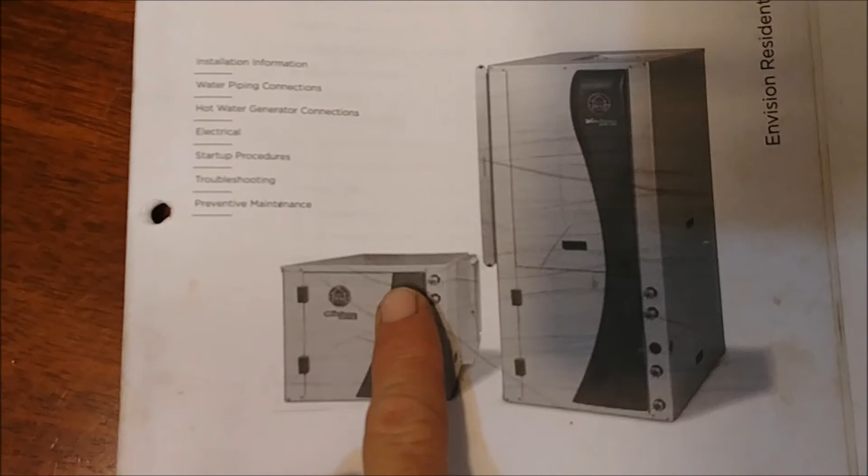So we've got your package units, the geothermal water furnace package units. The water goes into here, and if you have a desuperheater on it going to the water heater, they tie into here. This is a complete package unit. There's nothing else to it besides the loop, wherever it goes.

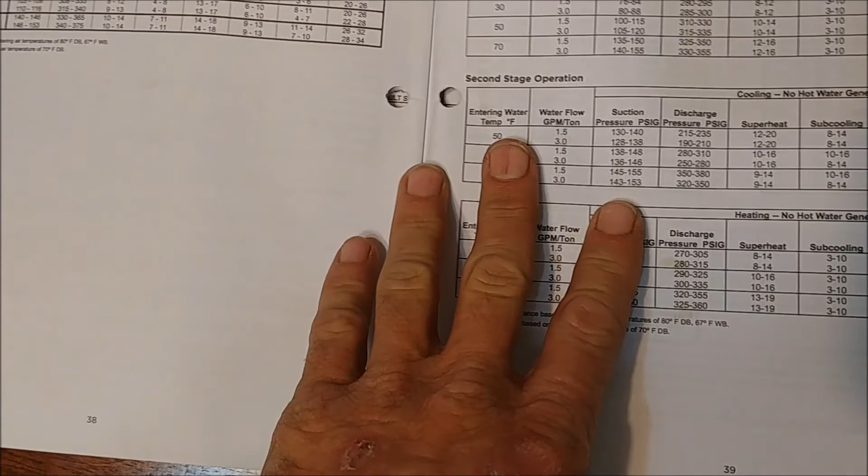But somebody asked me about ambient air temperature, superheat, and subcooling. So I wanted to make this quick video and show him. He was asking what the unit usually runs for head pressure on entering or outdoor ambient air temperature of say 70, 75 degrees, and what roundabouts would be the superheat and subcooling.

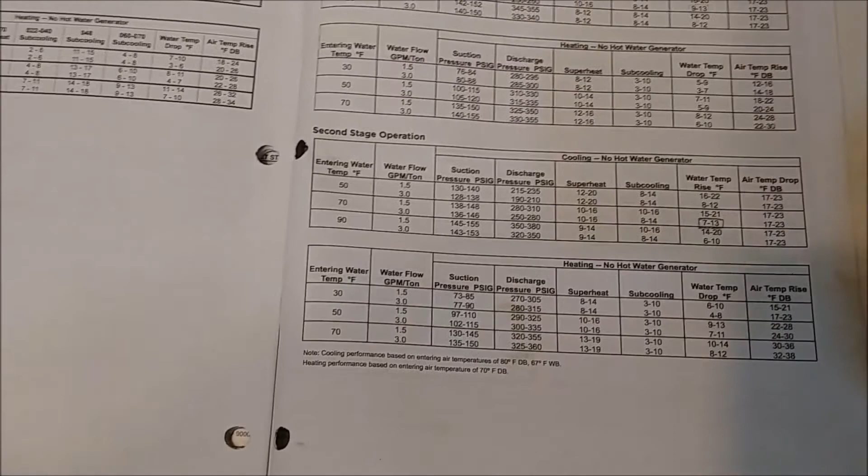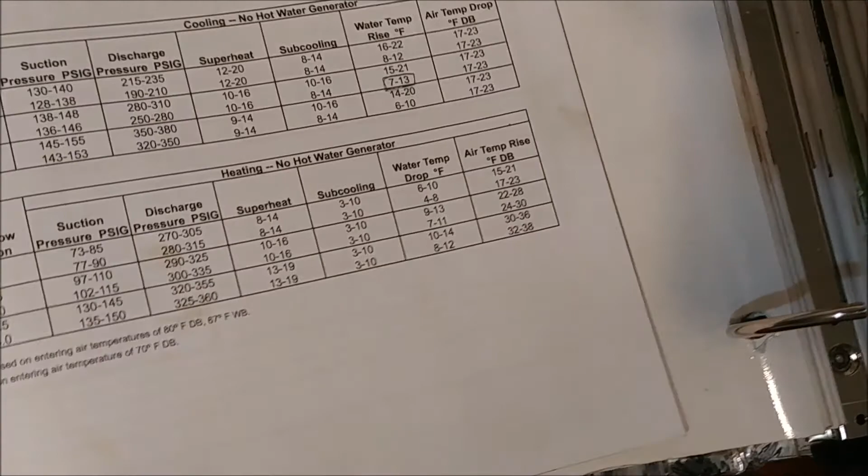So I found the parameters, which is in the installation manual. This is just for the Envision units. This isn't for the new Series 5 and Series 7, but I have that as well.

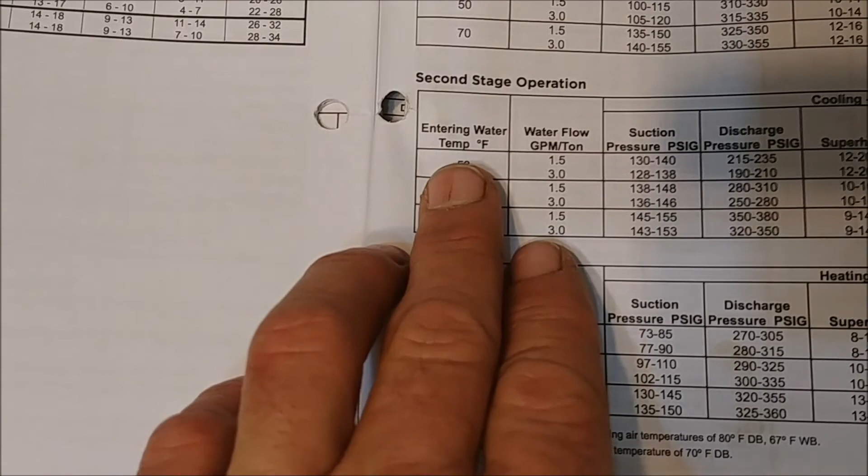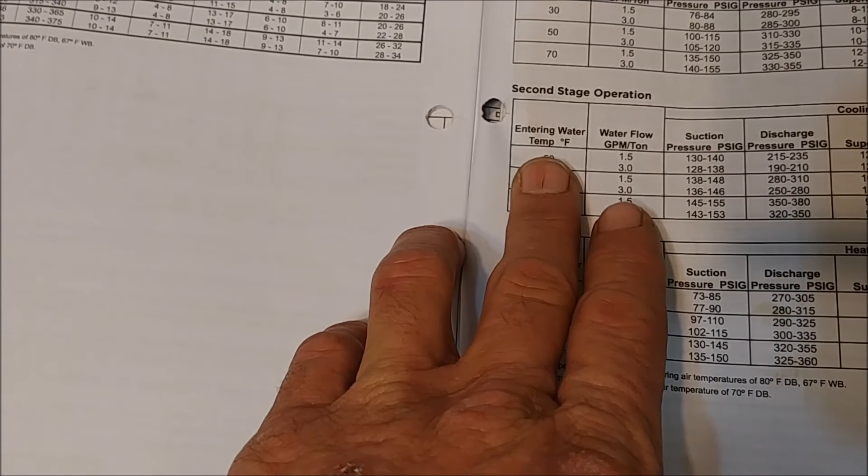But basically, your entering water temperature is the same thing as your entering air temperature, or your ambient air temperature to your condenser. Because if you're in cooling mode, your geothermal loop is basically your condenser. So you'd relate that in air-to-air terms as 70-degree entering water being the same as 70-degree outdoor ambient air temperature. So to answer that question, you can pause this to look at it.

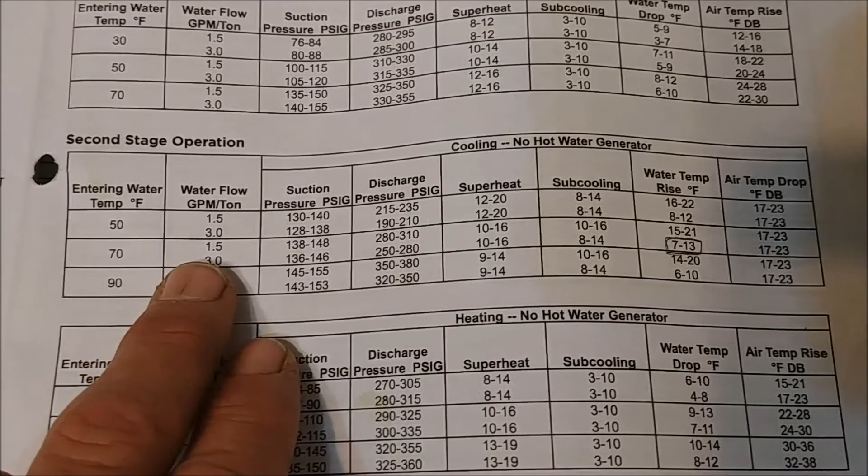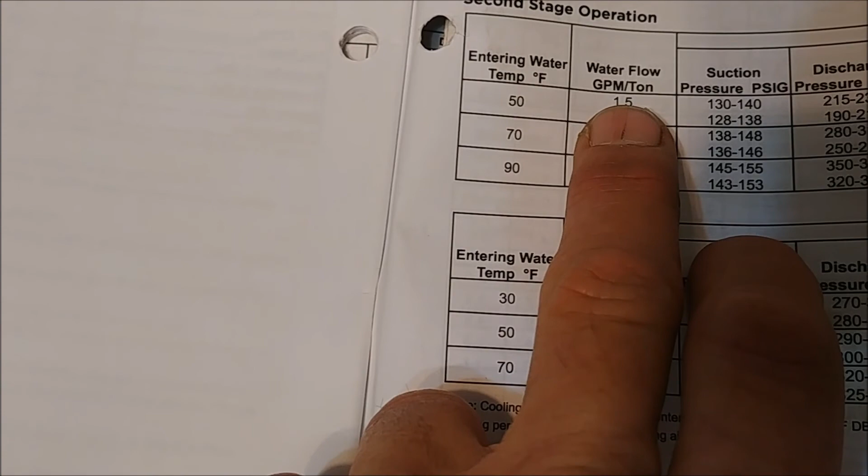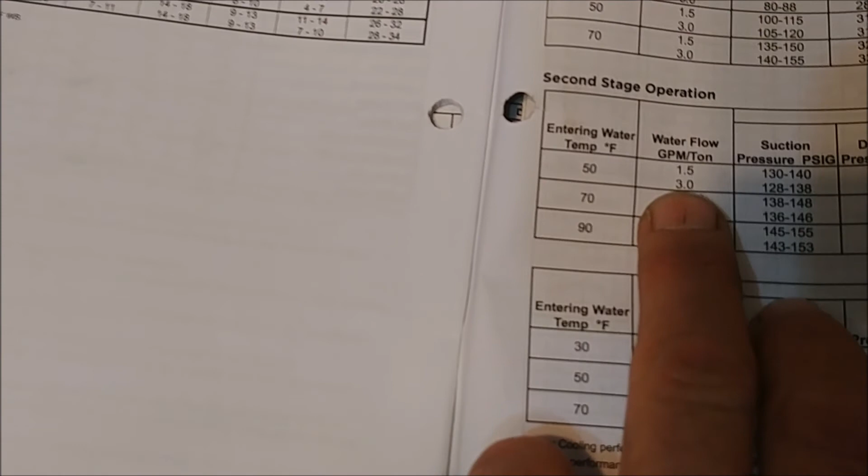You go across here, and the water flow rate is the speed, the gallons per minute, that goes through the unit. Typically you want 1.5 gallons a minute per ton going through the unit in an open loop system, and 3 gallons a minute per ton in a closed loop. So if you have a 3-ton unit, you want 9 gallons a minute.

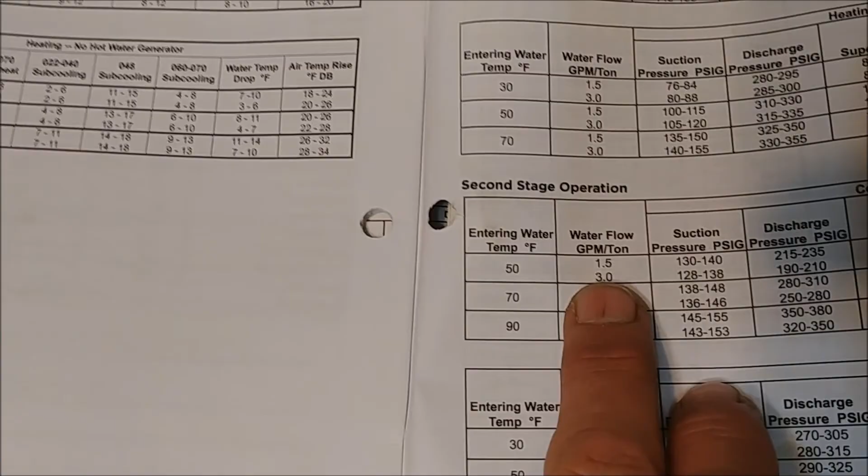And that would be the same thing in an air-to-air situation as having a variable speed fan on top of the condenser. Because I know some units out there, their condenser fan will speed up and slow down according to head pressure, especially for low ambient cooling.

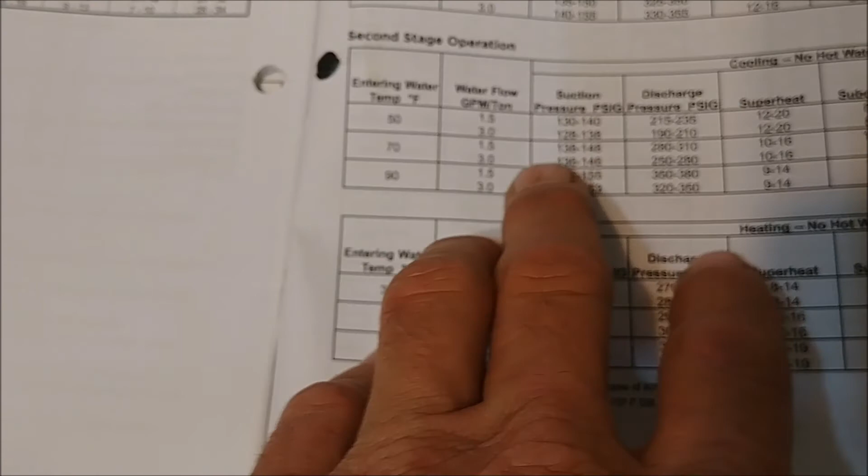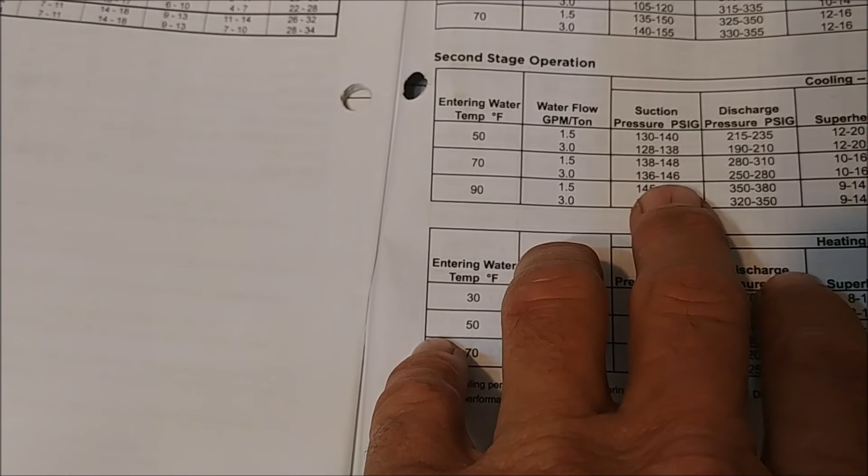Alright, but anyway, the discharge pressure, if you were on a closed loop system, this would be open loop, 1.5 gallons per ton, and closed loop, your suction pressure would be running right about there. Your head pressure - typically closed loop is what we work on, but if you ever get the open loop, these are the discharge pressures you'd probably be seeing.

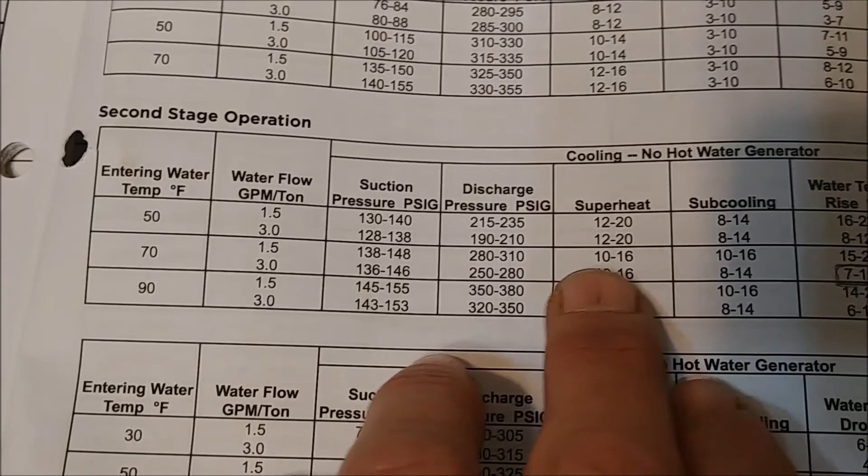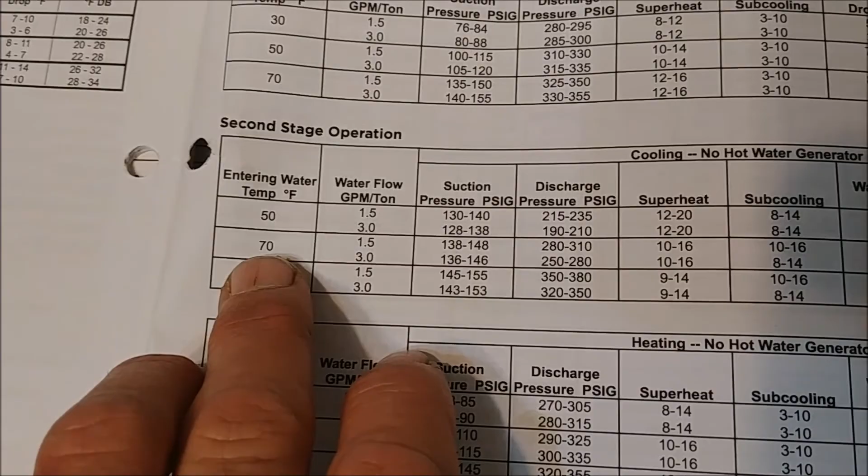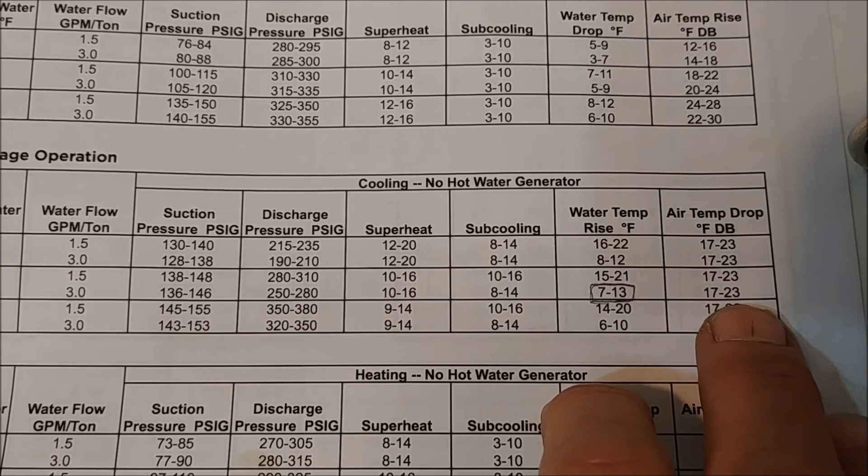Your superheat, no matter what, either way, 10 to 16, and that's at entering water temperature, which, like I said, is the same thing as ambient outdoor air temperature on an outdoor air-to-air condenser. This should be your air temperature drop, and in cooling mode these units do 17 to 23 degrees. So I hope that helps - that was a little bit on that.

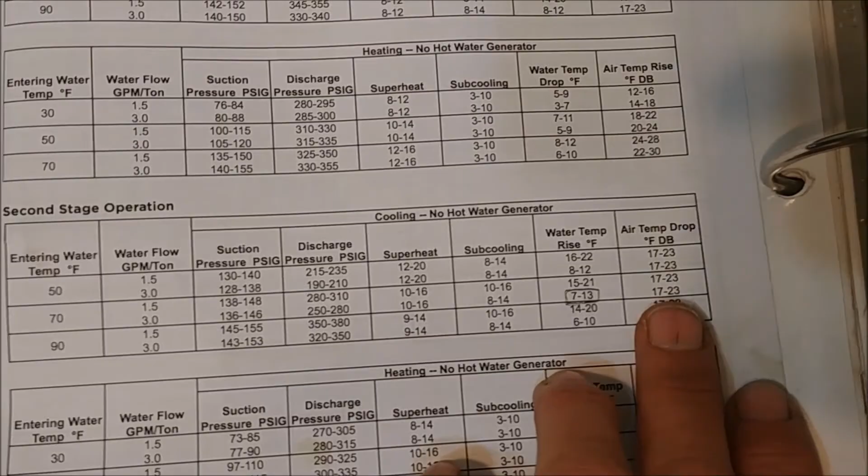This is the second stage operation. There's a bit of a difference in the first stage because these are dual capacity units in this chart. So I'll give you a second to look at them.

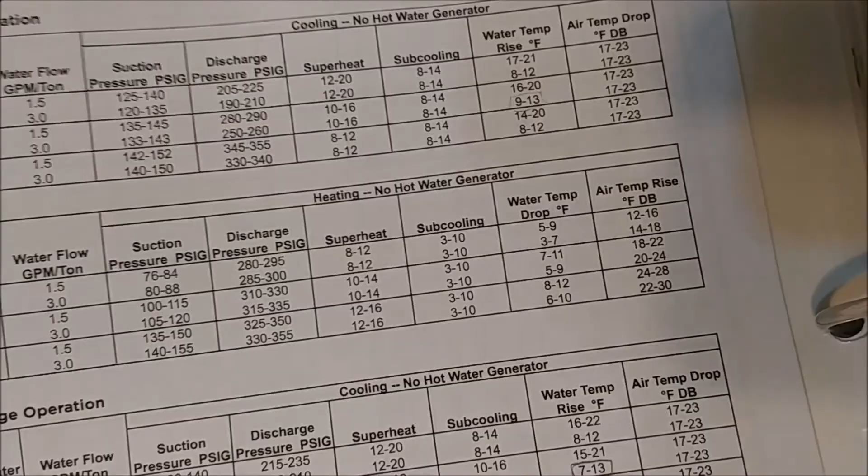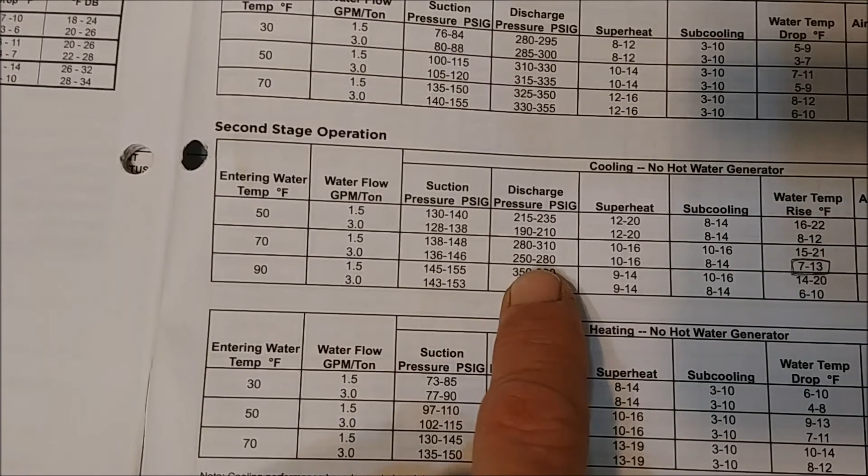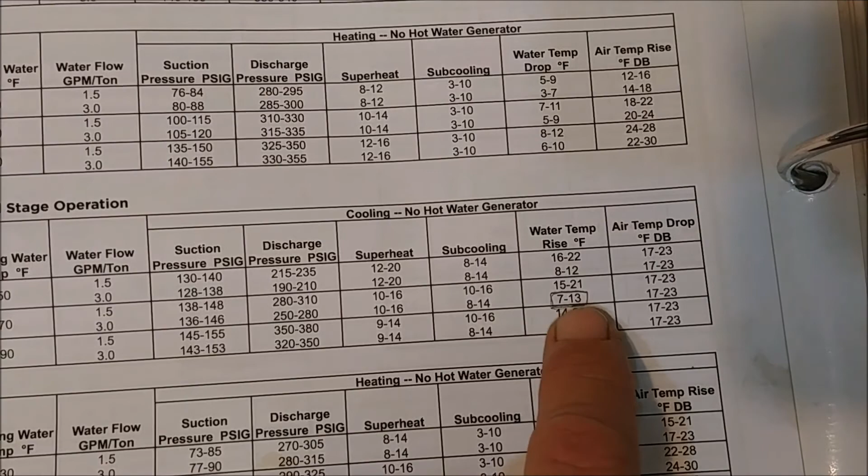This is cooling up here - I might have been giving you the heating one, but yeah, this is cooling. He wanted to know what it was in AC because he's from South Carolina. So 70-degree entering air, which is our entering water, will give you pressures around 250 to 280, not even 300. Superheat 10 to 16, subcooling 8 to 14, 7 to 13 degree water temperature rise, and air temperature drop across your evaporator coil, 17 to 23.

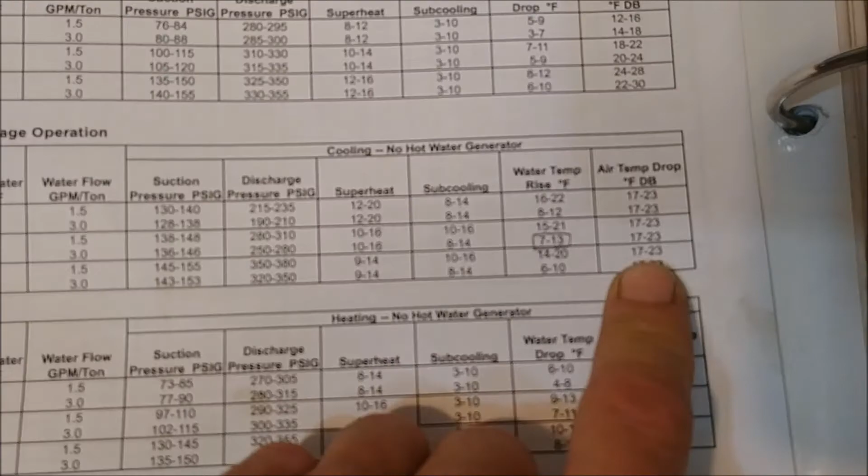And the heating mode is usually a little bit better, 24 to 28, 22 to 30. Because in cooling mode, you're getting rid of the heat of compression, so you can't do as good at cooling. And if you have a single speed unit, which is over here, you can kind of look and see what you get.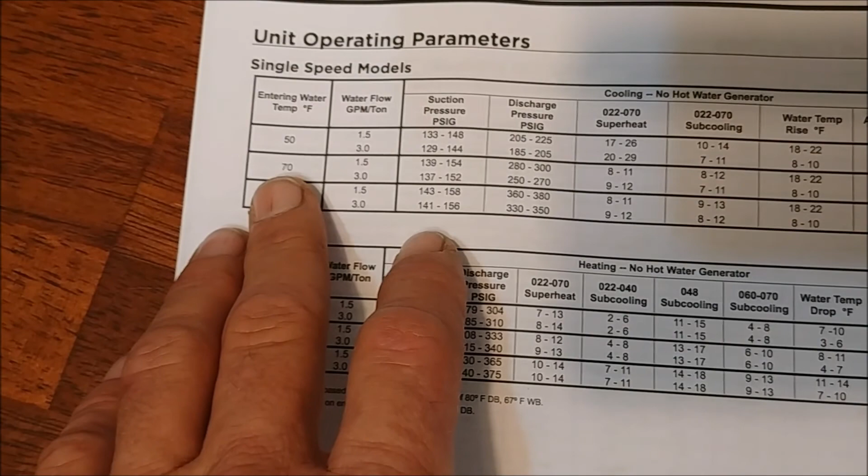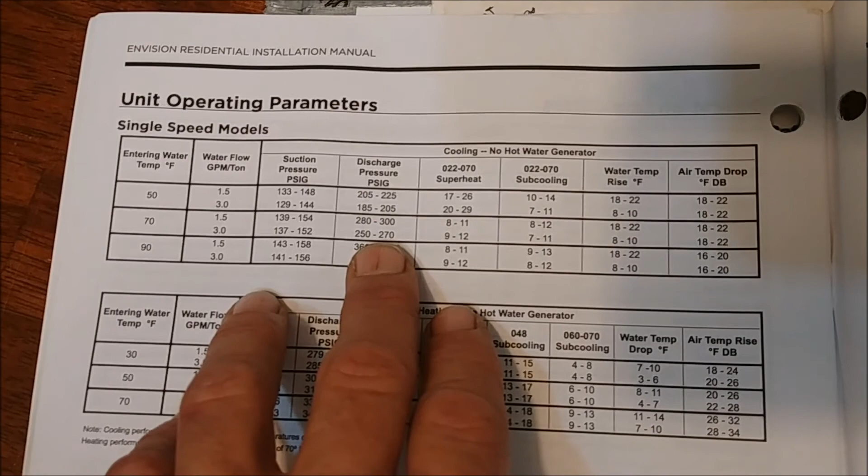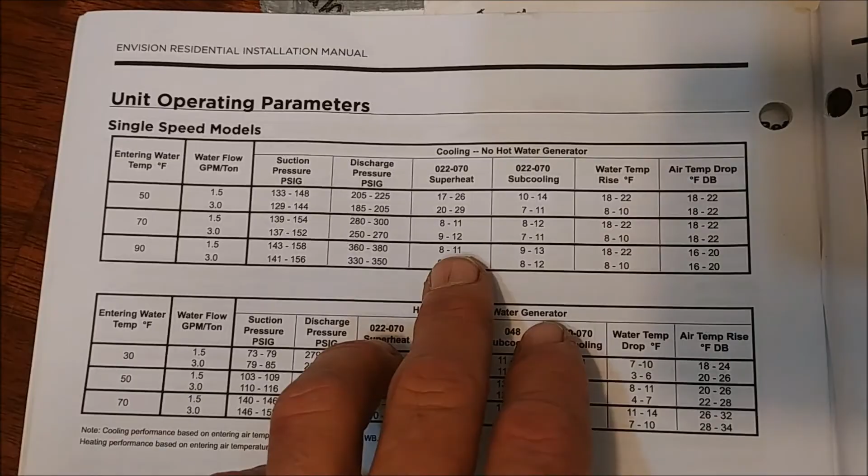Entering water 70, or in your case air to air, entering air temperature, ambient air temperature, 3 gallons a minute per ton, discharge pressure 250 to 270. So this is cooling without a desuperheater. The hot water generator is the desuperheater, which just takes water from the top of your water heater tank and puts it into the bottom.

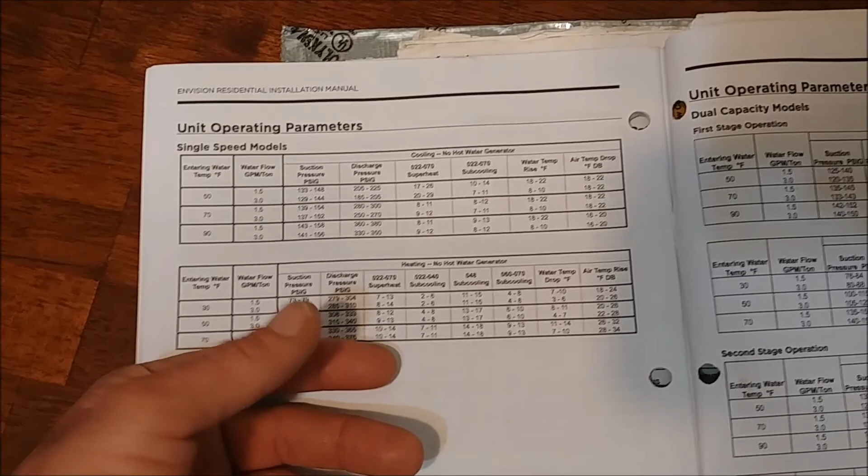After it goes through the unit, it adds about 8 to 15 degrees of heat to it, and the unit can do it without taking any efficiency away from the heating or cooling demand. So that's your single speed unit, dual capacity unit, superheat, subcooling, and all that, and then your second stage.

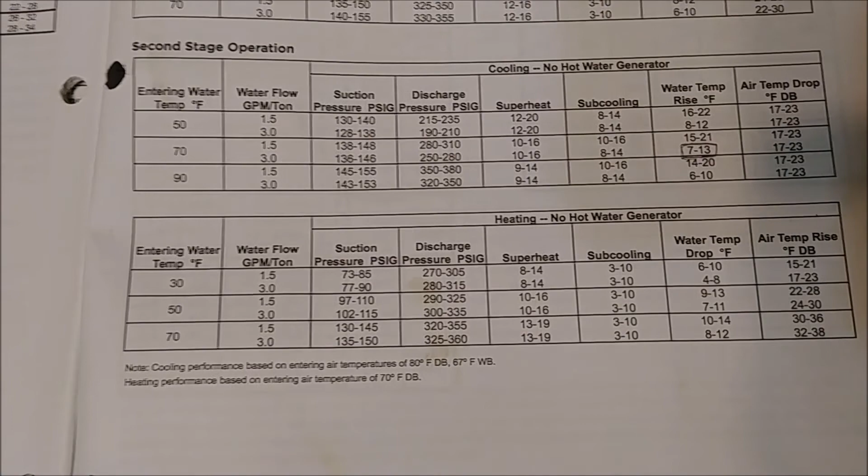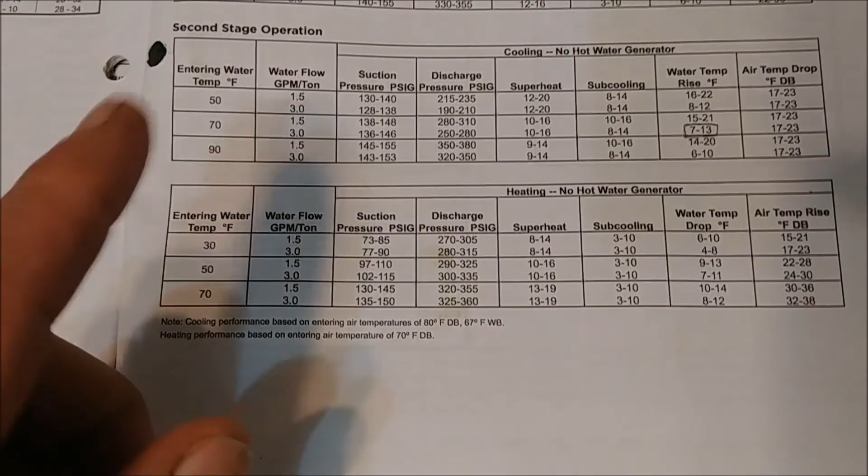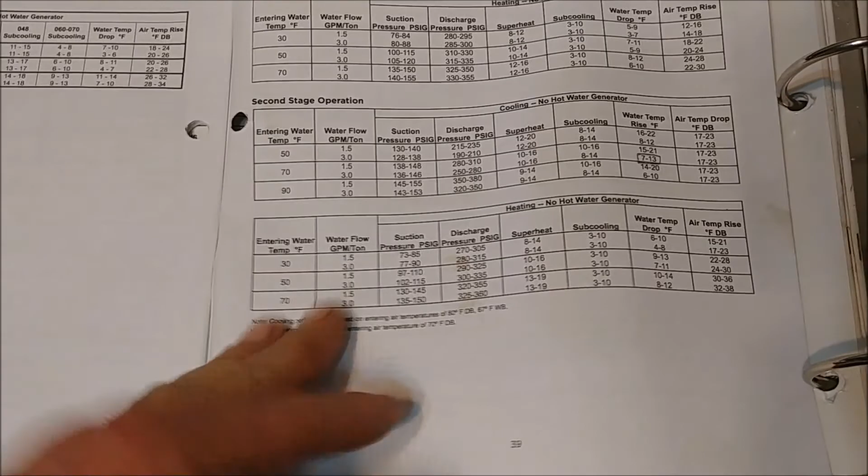You can, like I said, use entering air or ambient air, just like entering water. The speed of that is just like your condenser fan, because that's the speed of the water going through the circles in the coax coil, absorbing heat or dissipating heat into the water with refrigerant lines wrapped around it, real skinny ones. So that's it on that one.

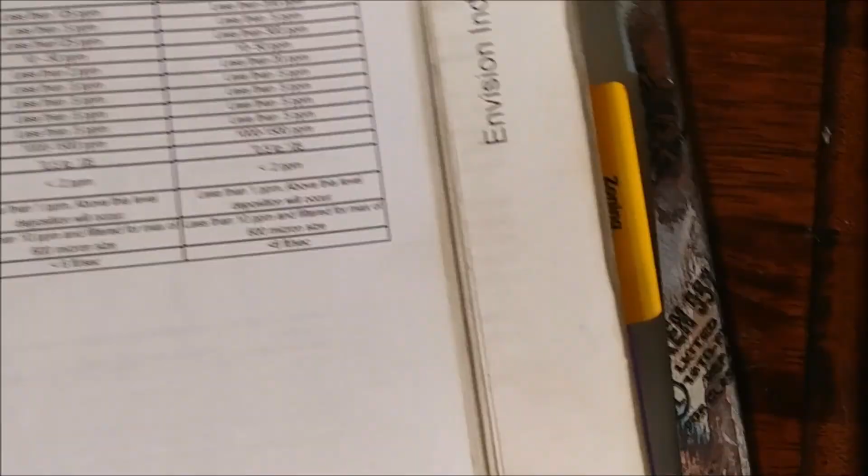That's the Envisions, that's the spec catalog right there. It gives you all your heat of extractions, heat of rejections. So that would be the one I'd be looking for.

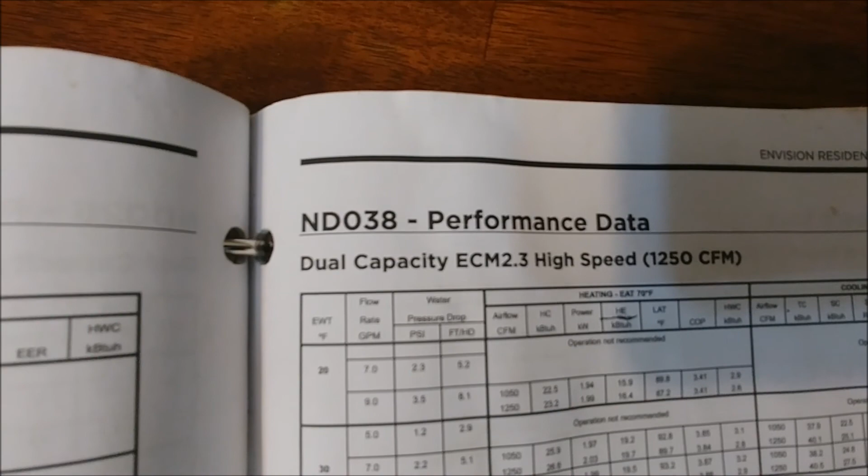Let me zoom out here. That's the one I'd be looking for if I was trying to get my heat of extraction and heat of rejection tables. So you flip through here, and you can see you got an ND 038 dual capacity unit, and that is high speed, so that'd be second stage.

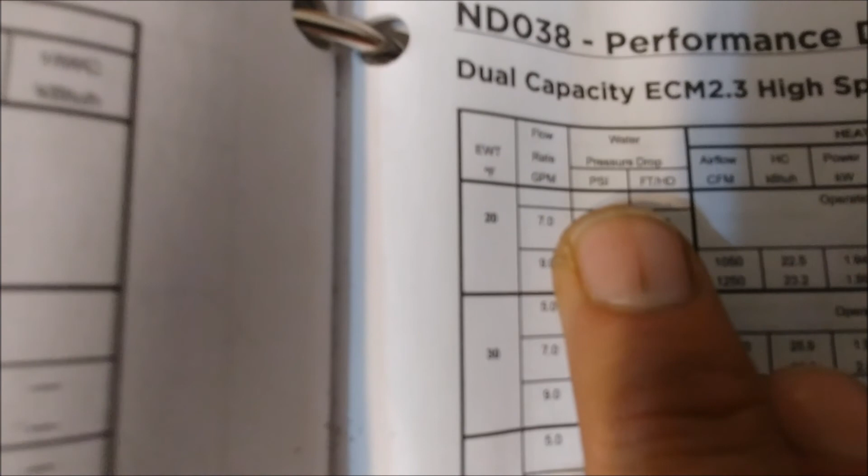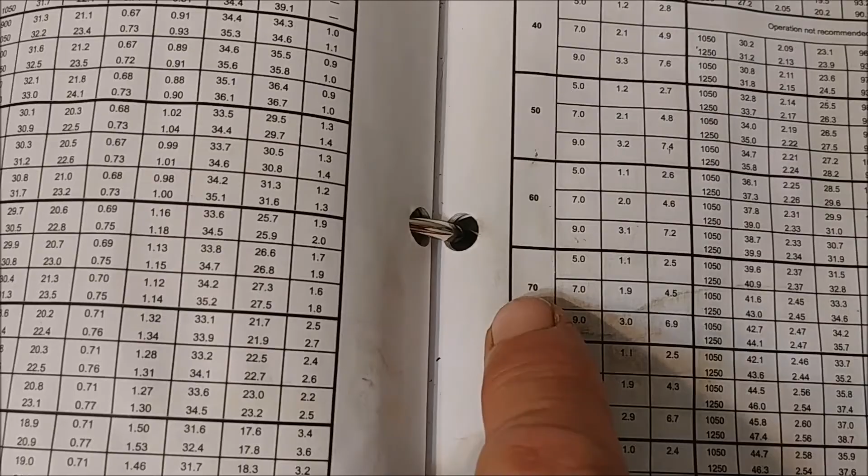And then the first thing you want to get is your water pressure drop and your entering water temperature. So usually it's typically 60-70.

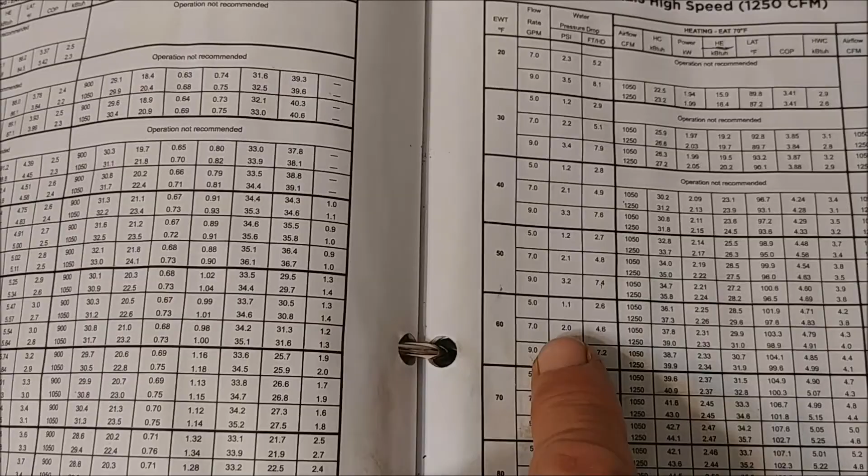So then you would put your pressure gauge in, on this chart, water pressure drop PSI, and say you got 70 degree water and you got a 3-pound pressure drop.

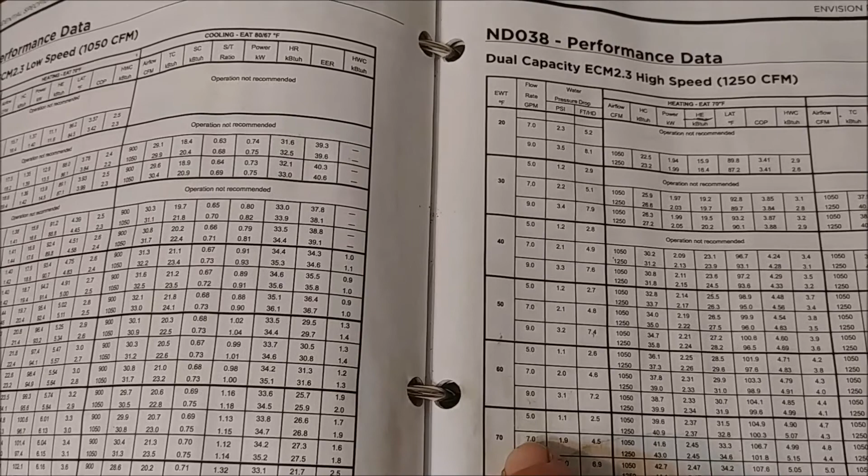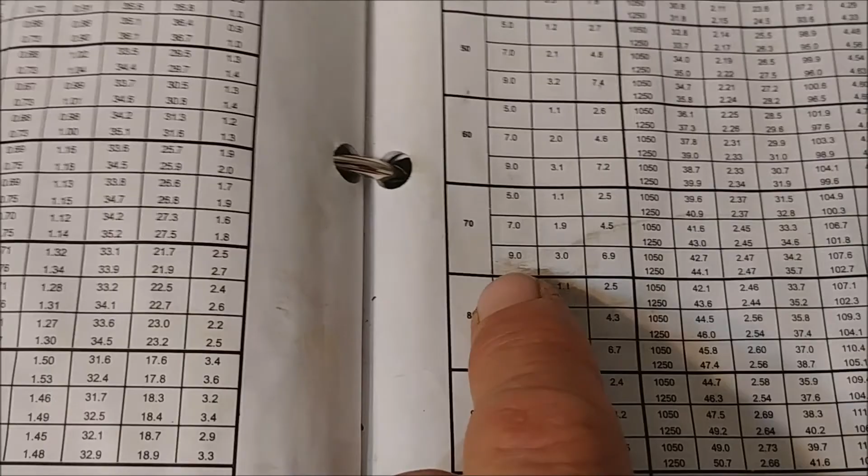So you put that 9 gallons a minute down, because that's one of your factors you're going to use in getting your formula. Then you get the leaving water temperature, and you subtract the two. That is your delta T across your water coil - temperature difference.

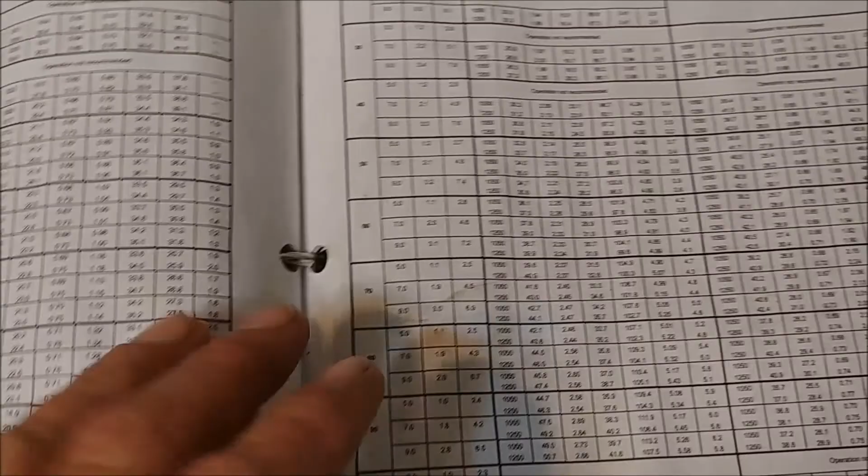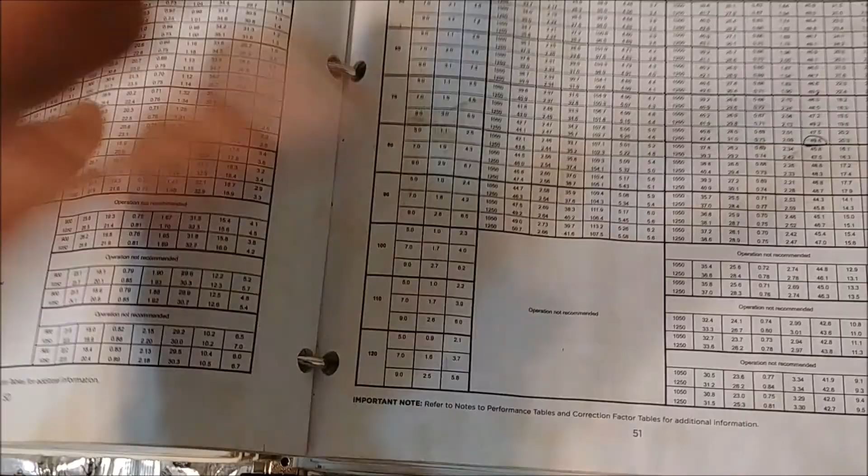Then you plug that into 500 if you're not using antifreeze in the system. So it would be 9 gallons a minute times 500 times, let's say 10, and then you multiply that. That would be 45,000 BTUs.

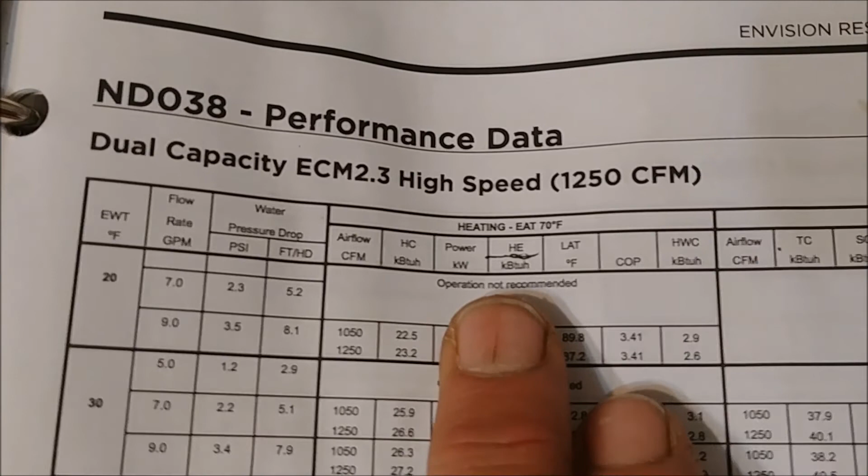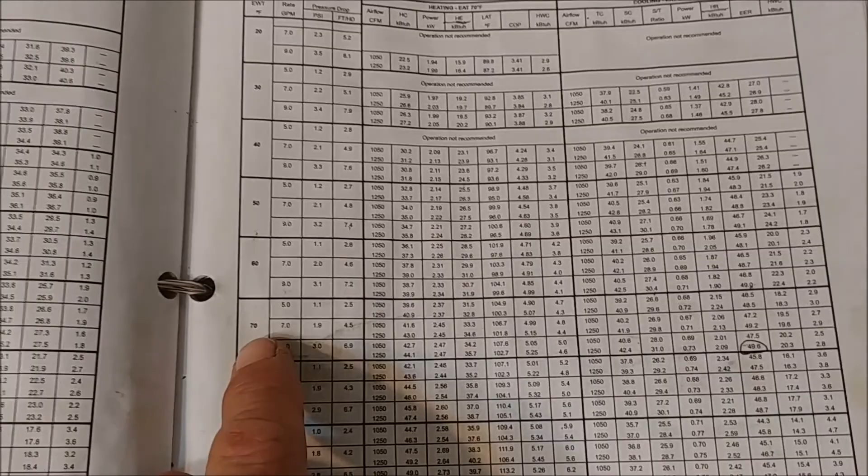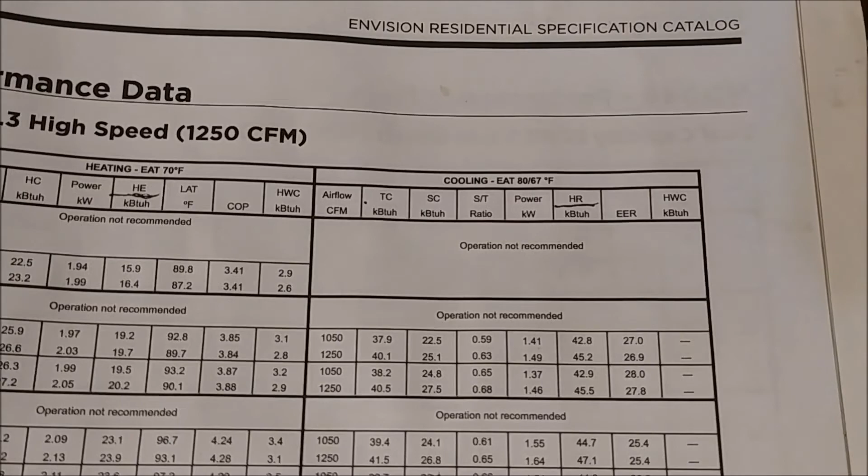And depending on the size unit, you would come over here to your heating or your cooling. You want heat of rejection or heat of extraction. So if you pan out a little bit here, and you know you're in the 70s, you bring this line around, and if you're looking for cooling, it said 45,000 BTUs. We come over here, this one is circled, third column in from the right.

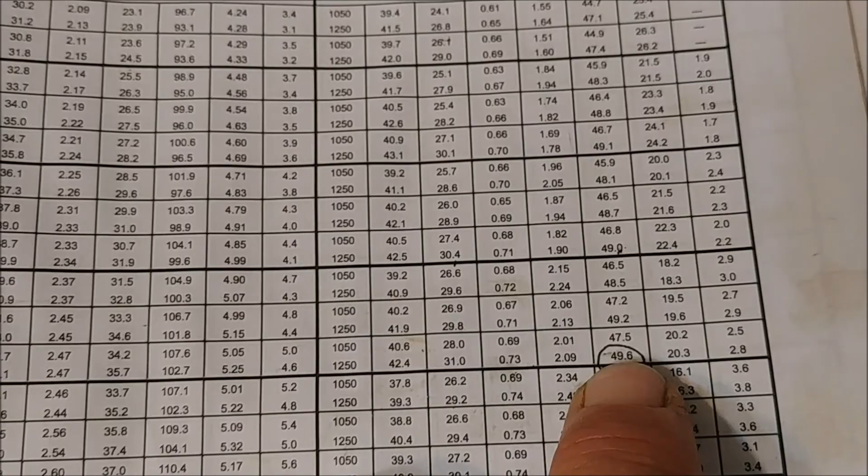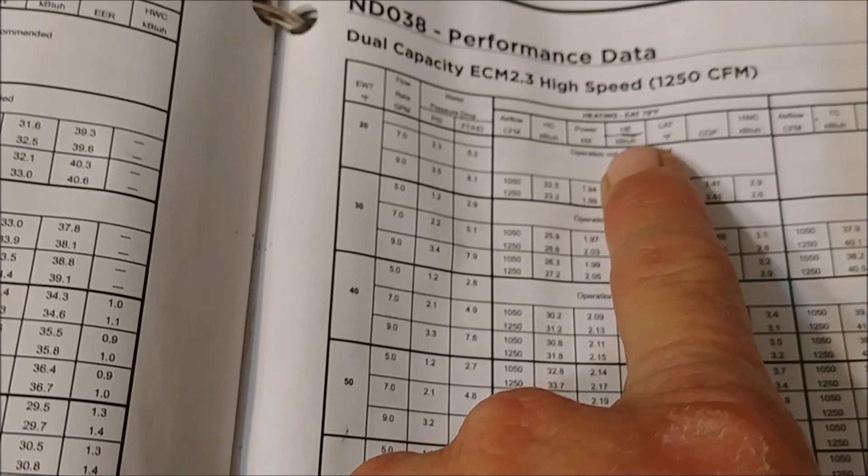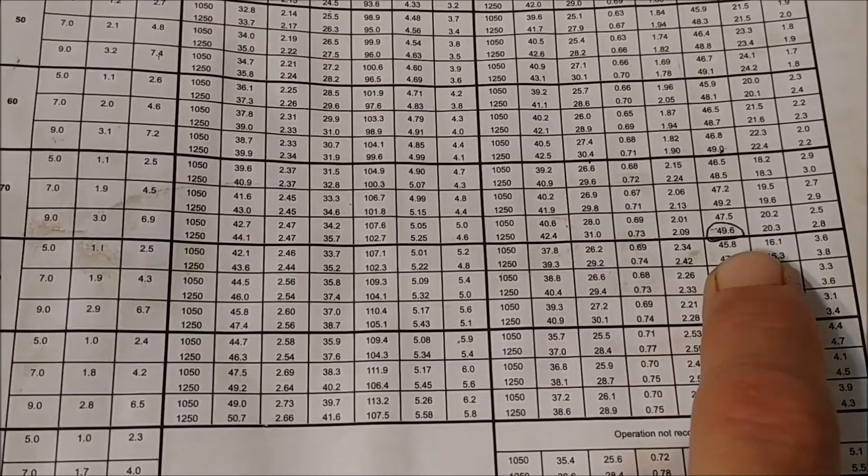You follow that column down, and we were at 45, just with a quick estimate, and that's roughly how you get that. Same thing for the heat of extraction - use the same formula, you just plug in the different numbers. And you can see that would be around 35,000 BTUs heat of extraction, and this one will be about 49,000 BTUs heat of rejection.

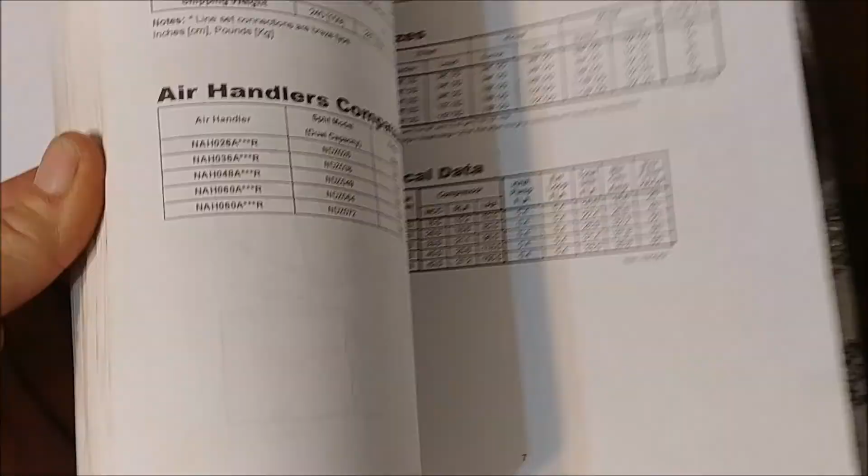And there's books on all of them. I mean, it's got all the information. I got this book when I was in water furnace school.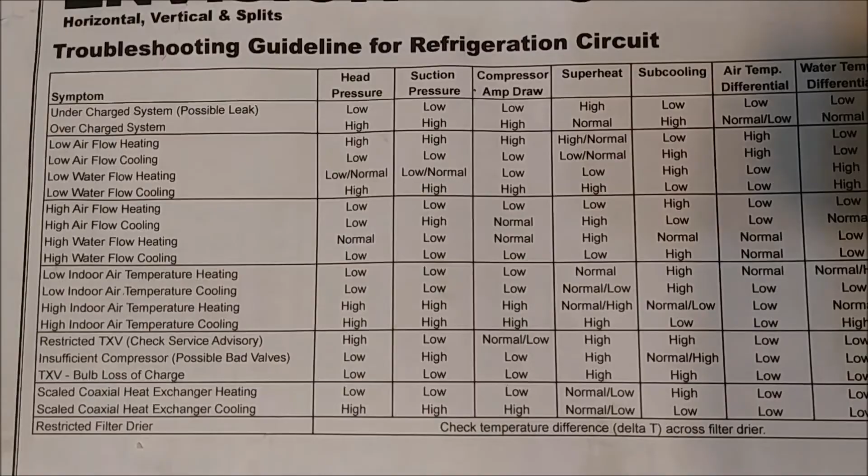And then they give you this quick reference guide here that you can probably pause on and study a minute. It tells you all the possibilities, high or low head pressure, and it'll tell you what the problem is.

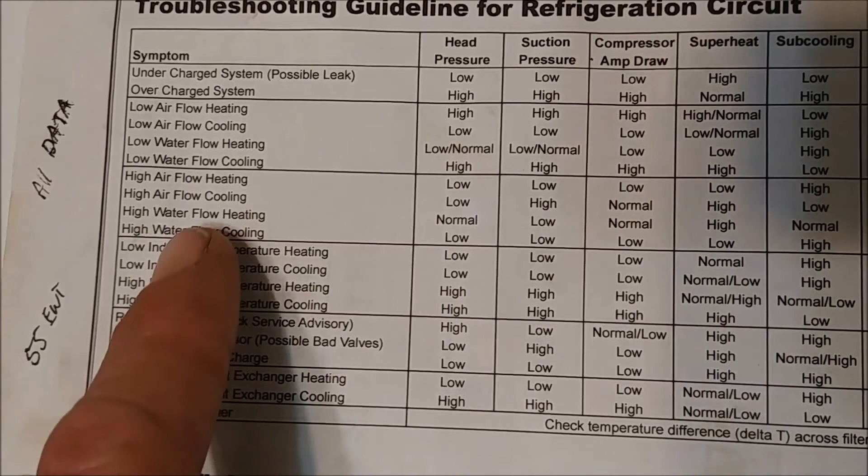High water flow, and cooling - man, the water flow is going too fast.

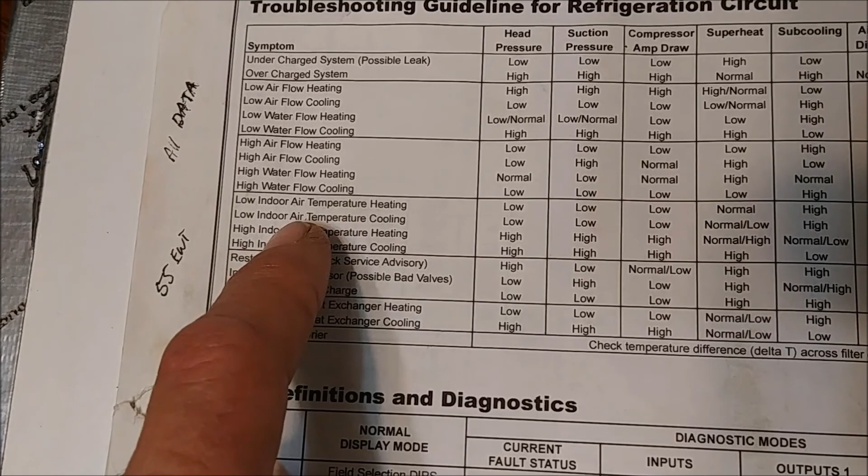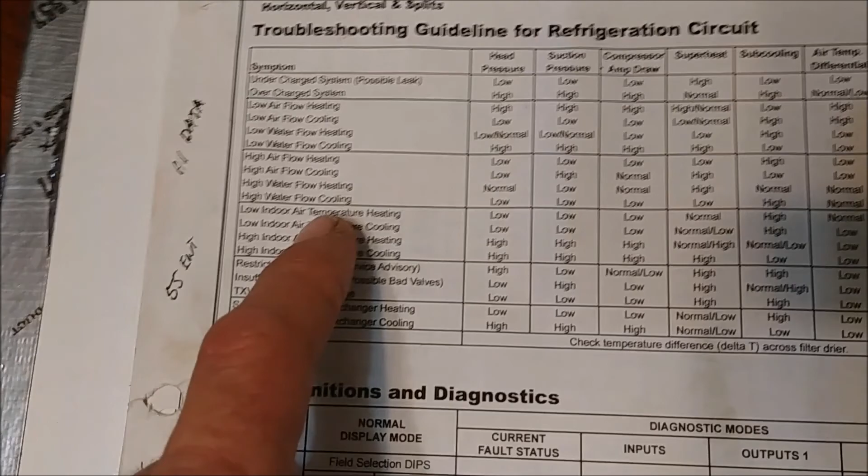Indoor air temperature - say you just fire one up and it's 30 degrees in the house, you're going to have a low head pressure, low suction pressure, low compressor amp draw, normal superheat, high subcooling.

So this is like a quick reference guide. If you come across something and you go do your chart and fill out your sheet, then you can check this. And there's another one of those sheets - I always print a bunch off to try and leave them with the units.